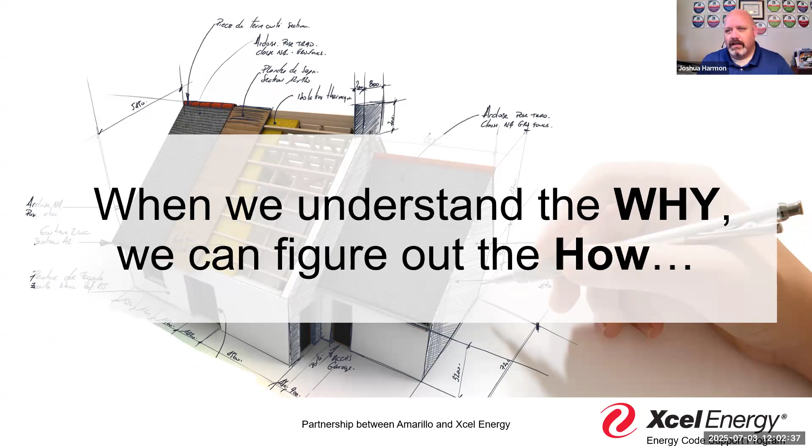So again, understanding that why is fundamental to figuring out how we're going to accomplish it. So when we think about the 21 residential construction code, it recognizes that the code is designed to provide us some minimum expectations, some minimum guidance on how we build buildings. And when we think about what's going on in the Panhandle region and the various communities that are there with building departments, we're looking for some consistency from the code's perspective on those minimum expectations.

And we know that there are people coming in and people coming out. Part of the problem is contractors move in, contractors move out, and they come with questions of, this is how we do it here, this is how we do it there. Well, the reality is by adopting model codes, hopefully we're eliminating some of those negative construction methods, right? And this becomes more of a standard uniform way of constructing buildings. Now that's how we take the residential code, right?

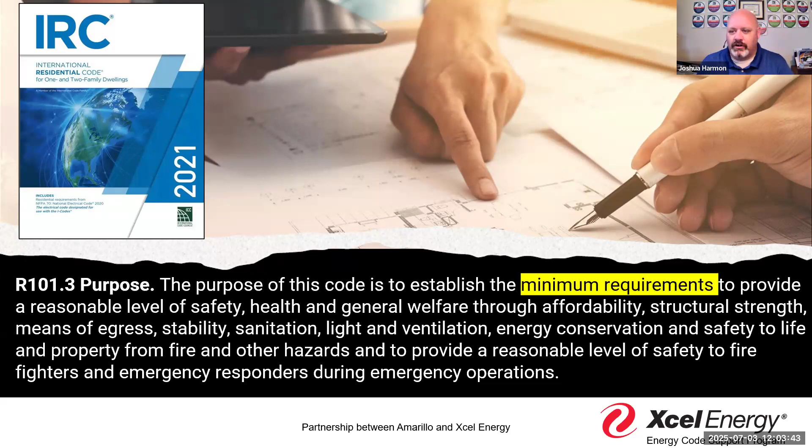Chapter 11 gets into the energy code to the extent that we adopt it, or if we choose to go with our own specific energy sections or adopt the IECC, we understand the IECC's intent was to provide a method of flexible compliance that would provide for the effective use and conservation of energy over the useful life of a building, right? It's all about flexibility. It's giving people options that we traditionally may not always think are there, but are really there, and to be innovative and to look at how technology is changing.

One of the things we're going to talk about during Coffee and Codes is we're actually going to look at some of the major differences between the 15, the 18, the 21, and maybe even the 24, to get how things have changed over time, and whether they changed enough to where you notice, right?

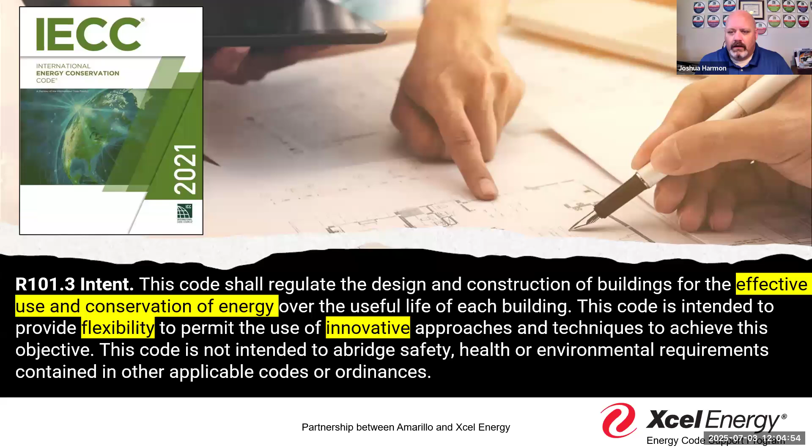And so I think that's part of that understanding: the code is designed to be flexible, whether that's the 15, the 18, or the 21. And I know we have all three codes within the Panhandle region. And so understanding that means we also have to back up a step and look at the scope of the code.

Now, I have jurisdictions that I work with that have chosen to maintain just the Chapter 11 and not adopt the IECC to make sure they keep separation between residential code, residential energy, versus what we see here, which is the scope of the residential provisions of the IECC extends beyond single and two-family dwellings and townhouses into group R2s, R3s, and R4s that are 3 stories and less above grade. So again, some jurisdictions have started to kind of whittle that down and say, hey, if you're a hotel, you're building it by the building code, so follow commercial provisions as well.

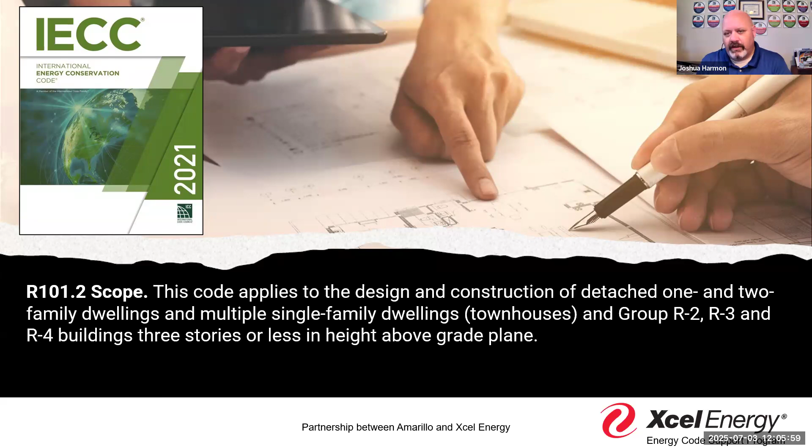And I think when you look at that, you'll see that there's not that much significant difference between the two. But again, it's an option. And it's why I think it's important to bring it up in the scope conversation. We start talking about wholesale, the overview of how we review plans for energy compliance. Because when you think about it in the context of the commercial side of the energy code book, you see that code applies to commercial buildings, and commercial buildings are defined as anything that's not already defined as residential. And so again, you get that kind of which section do I use, right? And so a lot of times I see jurisdictions doing that to kind of individualize their own approach.

But one of the things we saw in the 21 residential code was again starting to separate these concepts of the townhouse and the townhouse unit. Townhouse is still there as a building that contains 3 or more dwelling units, but the townhouse unit is more that singular dwelling unit itself, right? That extends from roof to foundation. Because what we're trying to do is make sure that we don't have common spaces, in some of those condo associations or townhouses, where we start to have uncontrolled air movement, heat loss, heat gain, but that those don't affect the individual dwelling unit.

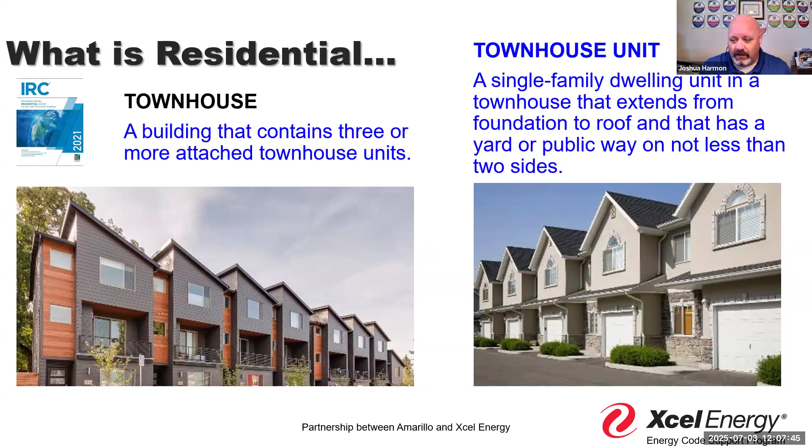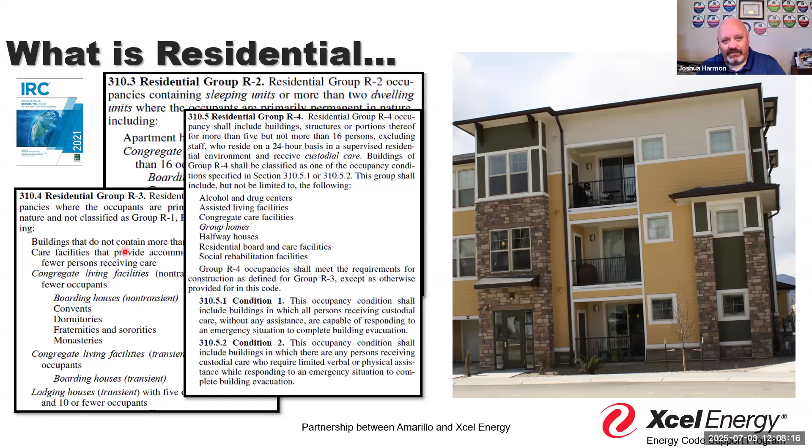Too many times what we'll see, especially in some of those townhouse units, is maybe a unit that becomes vacant, or more than one unit that becomes temporarily vacant, at which point that remaining unit is now paying to heat or cool potentially leaky neighboring units. So I think it's important that when we think about general plan review, we're looking at not just one singular concept, but we're expansive in what we think when we think energy code. Not just in the components of the building, but also the types of buildings. Remember, the energy code is saying we can expand the residential provisions into what would traditionally be considered R2s, R3s, R4s, right? And so when we start talking about those assisted living facilities, those congregate living facilities, things we weren't always thinking of in the context of the IRC, they may come into the IECC, right?

So when we think about plan review, I usually focus my energy code compliance into the 4 pillars. Now, if you remember, the last time I was out in April, we had worked on this little inspection guide to help address some of the concept of field inspections. I'm in the process, and maybe I'll have a draft by the time I get there in 2 weeks, of a plan review guide as well for energy code compliance. Not necessarily a step-by-step, but more of an overview of the higher level concepts, so maybe we can educate and inform our designers and our architects and some of our smaller builders who are thinking, what am I looking for, right? So that's part of what we're trying to do here: what are those main talking points, and how do we really get compliance.

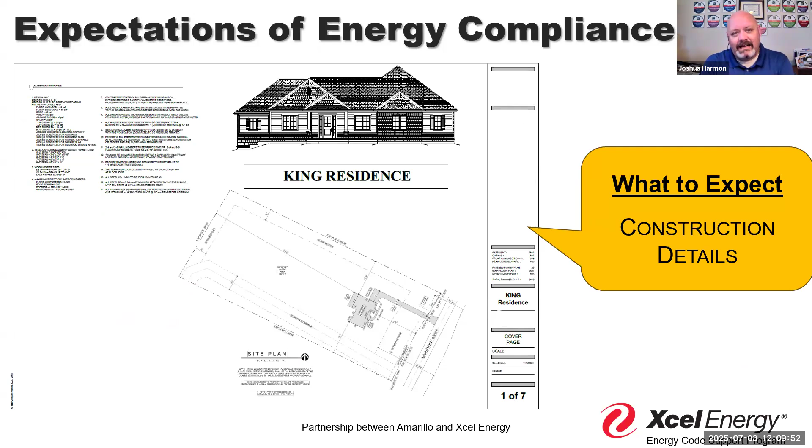So in that context, the 4 pillars that I see: building thermal envelope, mechanical systems, service water heating systems, power and lighting, right? Those are the 4 components. And within that building thermal envelope, we talk about the insulation, the fenestration, and the air barriers. But all of that is based on this expectation that we need construction documents, right? That there is certain information that's going to help guide construction, and that's going to be provided in the docs as part of our plan review process. Section R103 gives us a list of information that's supposed to be on those documents to help facilitate code compliant designs.

So when we're doing that traditional plan review process, we can throw in these expectations. Now, we talked about this a little bit when we were there for the in-person training a couple weeks ago. There are different ways to do this. There's the holistic approach to plan review where you do everything. You get one project, you do it all, right?

At which point do you take it page by page? You take it book by book, section by section. There's also the opportunity to have what we call segmented or specialized plan review, where you may have a set of plans examiners who do the structural components, and then you have a different set of people that do the mechanical review. Someone else does the electrical review. A person does the energy review.

So there's different ways to approach energy code compliance, and each jurisdiction is different in how we do that. But if we follow what the code tells us, really the only difference between the 15, the 18, and 21 is that in 21, we specifically call out energy compliance path as one of those things we need to know and identified on those construction documents.

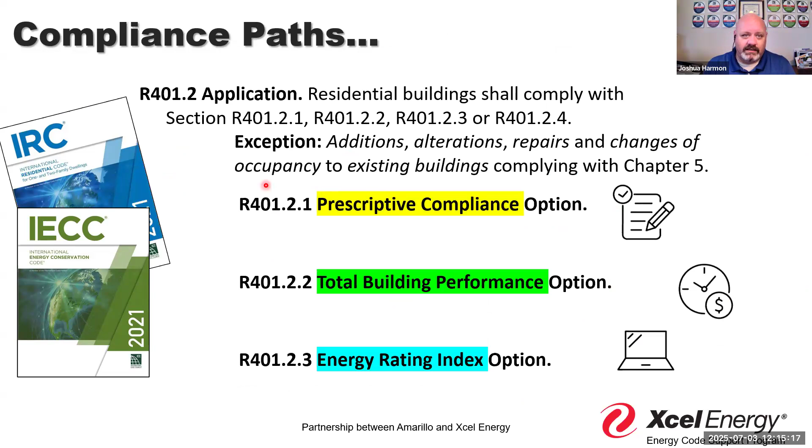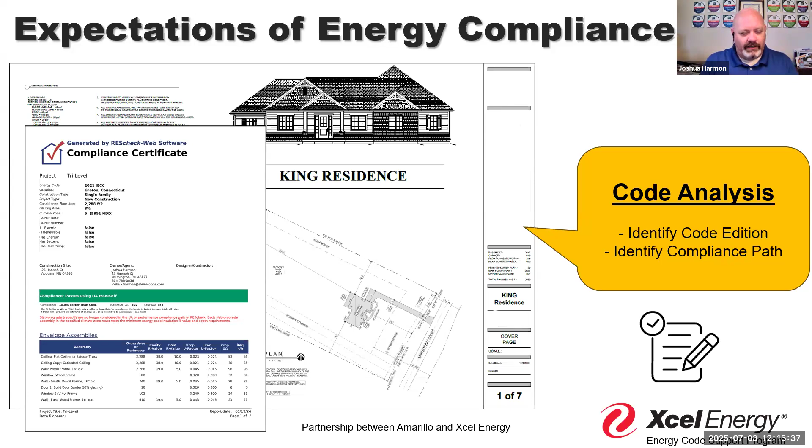The only problem with listing some of that prescriptive is, again, prescriptive compliance can be shown in more than one way. We can show prescriptive compliance by use of either a REScheck, looking at the total assembly, the total average U-factors, or we could look at it as an R-value. So there's different ways we can look at prescriptive.

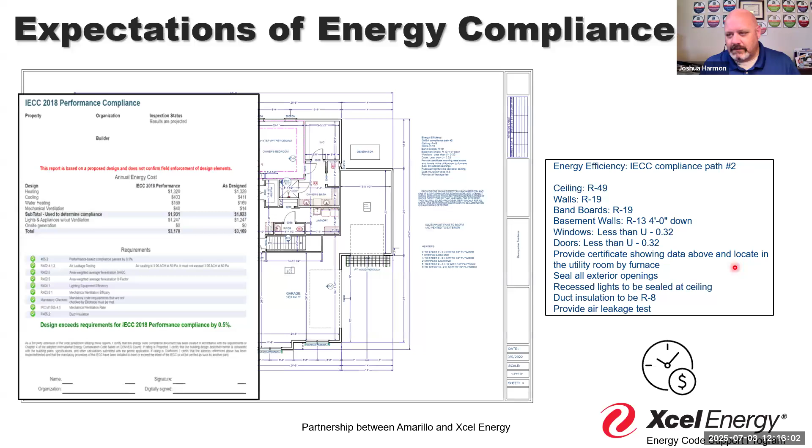If we're looking at a building following IECC compliance path number 2, what does that mean? We assume, based on the report, that they're talking about it in total building performance. But it's nice to have that extra performance in that list just to confirm. Then we've got the ERI, the Energy Rating Index. So again, we're going to get different documentation based on those compliance paths.

With those two performance compliance paths, I'll reinforce that you're going to get a report at the beginning prior to plan approval, and then a report at the end prior to final inspection. We do inspections throughout the process, but with those compliance paths, there's a third party coming out there verifying that those systems are installed properly. They're going to say, we're expecting an R21 in this wall. We came out, we verified the R21, and now we can run this report, and it performs at the end the way we thought it would from the beginning.

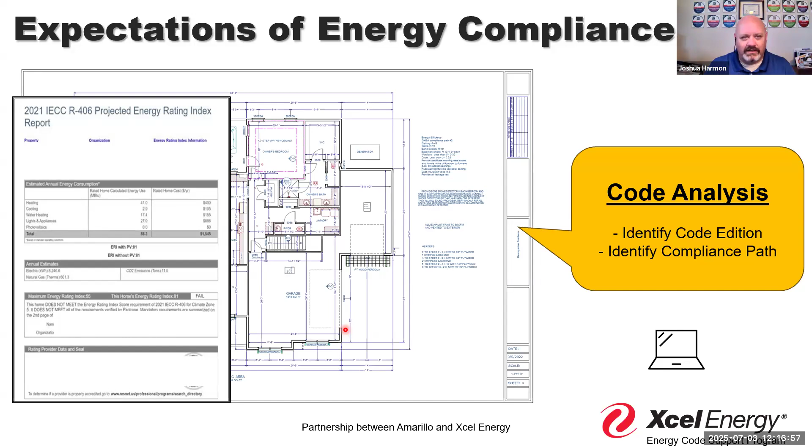Depending on your compliance path, that can have some impacts, but we'll talk about compliance paths in a much deeper conversation later. Today, we're just thinking high level.

Beyond that compliance path, we get into the concept of the insulation, the envelope, that thermal envelope that separates our environment from the interior occupied spaces, that allows us to control conditioned space from non-conditioned space. So what are we talking about? What are we looking for in that? Well, I say we tend to look for these four concepts.

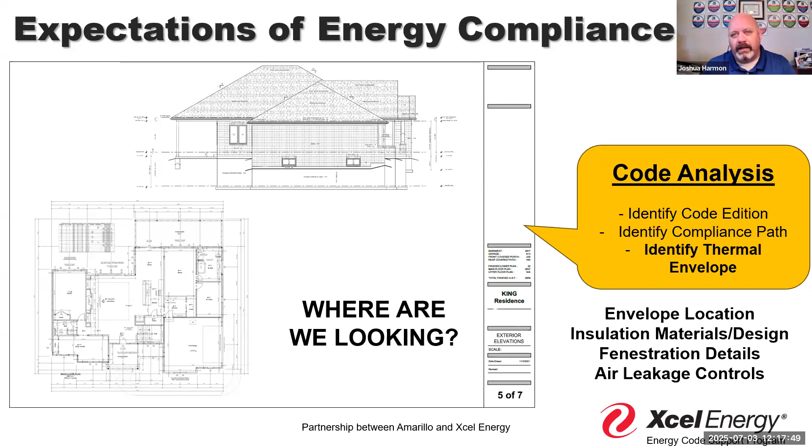They're identified throughout the code in different subsections. We're looking for that envelope location, because if we know where we're looking, that's part of it. If I walk into a building - and I had this conversation with a designer the other day - I said, where's the depiction of the thermal envelope that's required by section 103.2.1? Their response was, anywhere there's insulation is part of the thermal envelope.

Are you sure? Because if that's true, then I'll use my pen here. When you installed insulation in this wall, and in this wall, and in this wall, and in this wall, here, here, here, and here, are those all separate conditioned spaces? Well, no, that's sound attenuation. Well, then let's be clear what we're saying.

I tend to - you guys have known me, heard me long enough - I can get kind of grumpy, and a flippant response from a project designer usually gets a flippant response from me. I'm glad I don't work for any jurisdictions anymore, because saying something as simple as all insulation is going to be part of the thermal envelope - you put insulation between those up in that ceiling area, but is this ceiling going to be vented or unvented? It's not a simple conversation of all insulation. It's too easy of an answer.

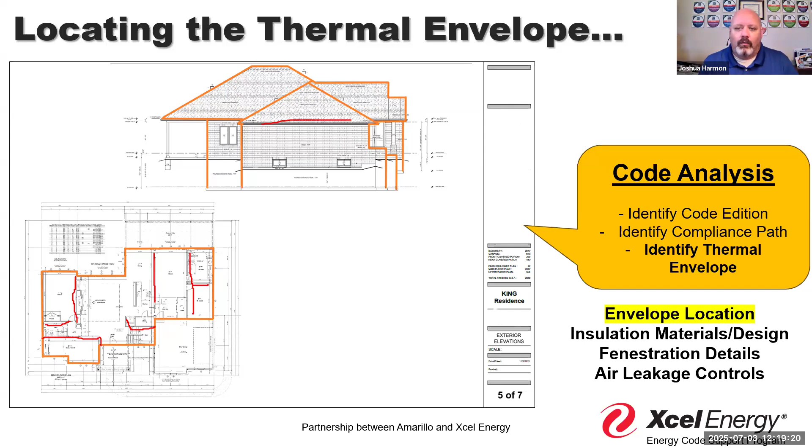We need to know where these are, because if I know where they're at, then I can better perform my inspections as a building inspector. Once I know where they're at, then that can affect what they are. It gets more into that concept of what insulation is being provided.

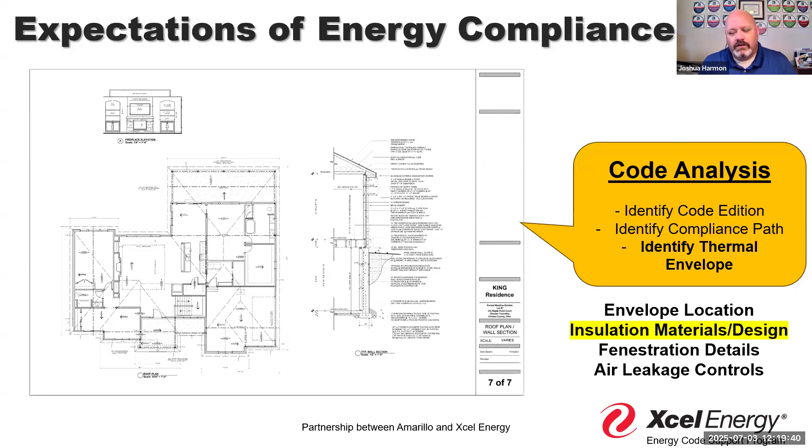Because if I'm looking to control - we see here some batt insulation versus some different types of maybe spray foams or different materials being applied. Again, each material, we know that insulating materials do different things. Not all of them simply resist heat transfer. Some can also resist airflow.

So if I'm installing a rigid insulation, or a set or certain thickness of spray foam insulation, like we like to do, that's going to have a different impact on my building assembly than if I just install mineral wool, or if I just install some type of batt insulation, fiberglass batt.

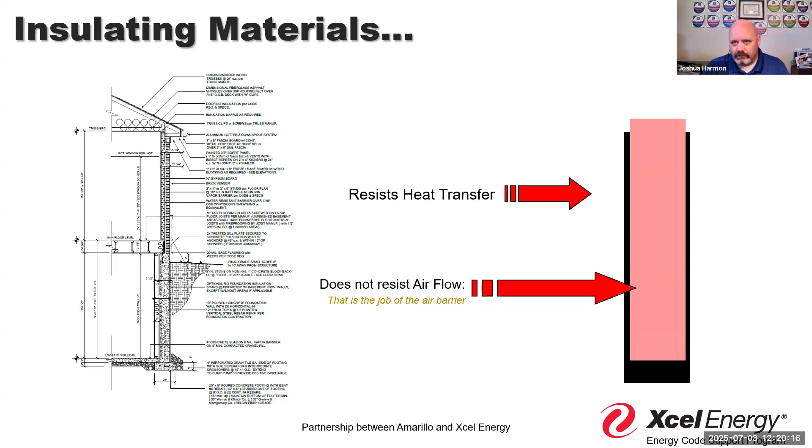Beyond the material differences, there are also insulating differences, so I can't just say one is just like the other and call it a day. We're going to have deeper conversations about what it means to review for insulation. We're looking at two different types of values: an R value, which represents the thermal resistance rating of that singular material, versus a U factor, which looks at how much heat transfers through the entire assembly.

We know that most walls aren't just a single component. There's drywall, there's cladding, there's sheathing, there's barriers, and all of these different components in that assembly. So we want to make sure we can take advantage of all of those different thicknesses of material and their different thermal resistance ratings.

One thing I point out is in my particular home, which is a little different than the one across the street where Annie lives, my house is closer to the state route. So they installed thicker drywall intentionally on my walls, and they insulated my exterior sheathing, or cladding. The vinyl siding got foam insulation behind it, which is different from my neighbor. So again, we both have the same R13 in the wall, but we don't have the same U factor because of those differences.

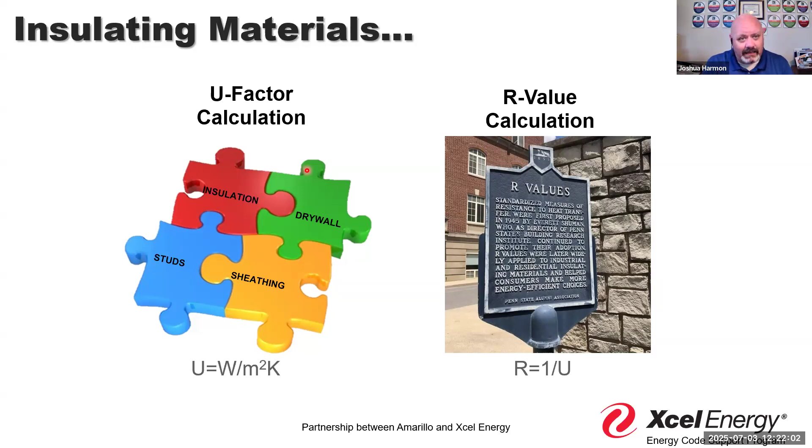Mine was for sound attenuation. I guarantee that when Bill was building this house, he was not thinking, 'I bet I could insulate a little better with an extra quarter inch of drywall.' But in essence, he did, because we understand those are different systems.

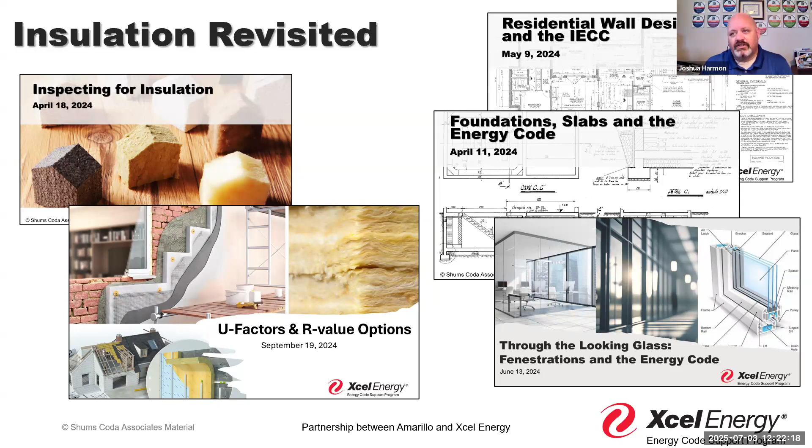If we have designers that have questions along the way, we've got a variety of different trainings we've done over the past two years that can help in understanding those processes. We can always send that information out to those that might need it.

We understand that there are a variety of different materials that provide thermal resistance, and those different materials can provide additional qualities. If I'm using mineral wool, I might have more water resistance than if I use cellulose. A blow might be easier to install post-construction versus a spray foam, or a batt. I might get some thermal or water resistant nature through different types of rigids and sprays that I don't get through batts and blows. So there are different types of things to consider.

One thing I think is important to reinforce, and we'll talk more about this when we get into insulation-specific plan review concepts, is that if we start modifying or changing these systems, we can impact more than just the thermal value. It's not just making sure we have an R10, R13, or R19 in the wall. It's also thinking about how that affects water resistant barriers.

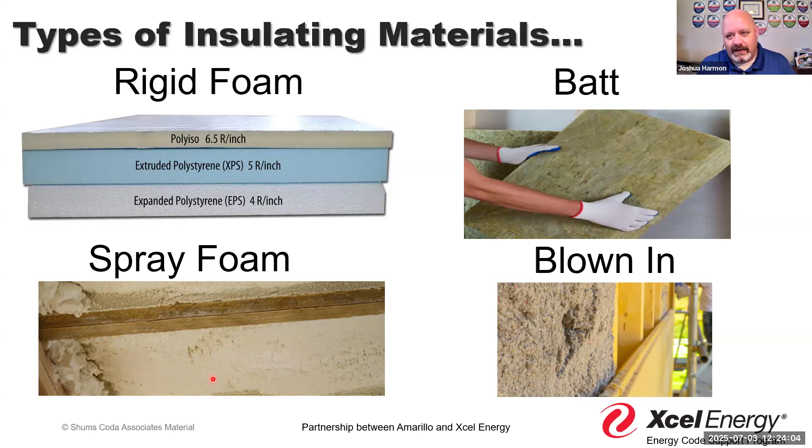We want to make sure we don't create a situation where we originally spec'd out spray foam and then decided, 'I don't want to wait for the guy to get here, we're just going to batt it up.' Did you think about the location of your water resistant barriers, your air barriers? That spray foam was going to do two jobs, and now you have to find a replacement to make sure we don't have water accumulation, moisture, and humidity getting in, like that dust that blows in from the east and fills up some of those spaces. Spray foam won't be affected by the dust as much as batt insulation might be.

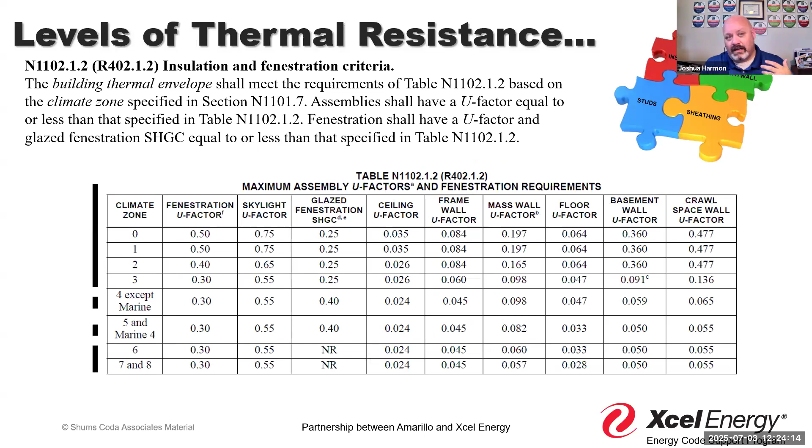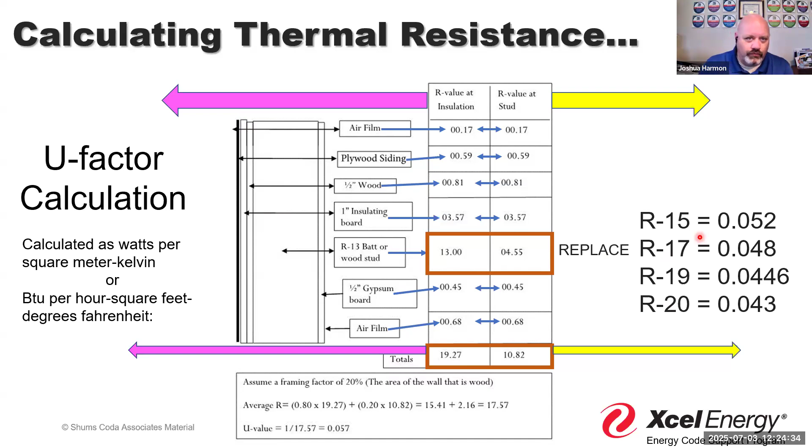We know there are methods of calculating, and we've talked about that. The tables exist for us to compare to that prescriptive compliance option, and we see different values provided. I don't think I have one in here that shows the multiple years at once, I should have, but we can see how we can start to move, modify, and change some things, and really affect how that building's total U factor is impacted, the assembly, just by moving one piece of material.

One thing we're going to be talking about in one of our future sessions is the role of the ASHRAE Appendix A. In the 2024 IECC, there's an appendix that might be useful to print off as an example.

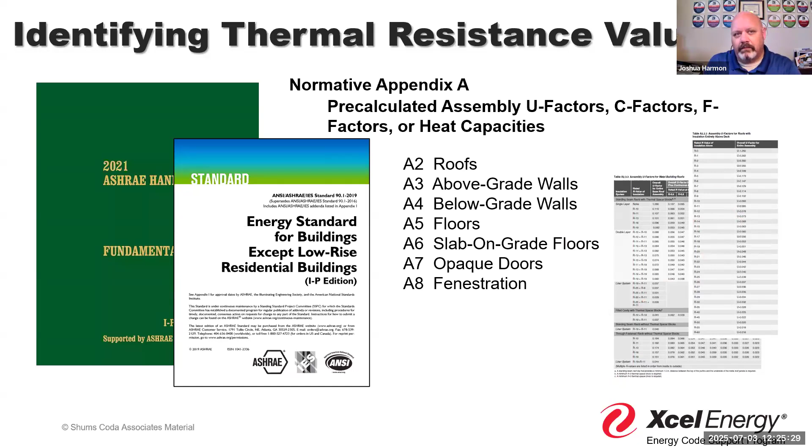What Appendix A—I think it's 24 IECC Appendix RA or RJ, one of those—does is provide a series of alternative designs. They take things like roofs, walls, and floors and give a U factor based on this R value and this thickness of wall, or this type of insulation, this type of concrete versus block wall design.

So again, it gives us some options to help make life a little easier calculating those values. But after we got those values designed, we once in a while want to make sure we think about the type of information we're getting. We don't want something that just says, 'I'm doing a 2x4 or 2x6 stud at 16 on center, so just insulate and put a vapor barrier per the code, whatever that means.' That's not helpful, because depending on our climate and our code, we might have completely different values we're looking for.

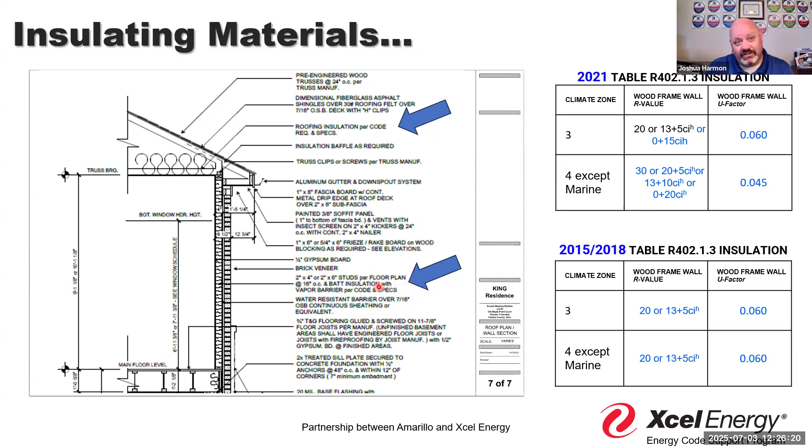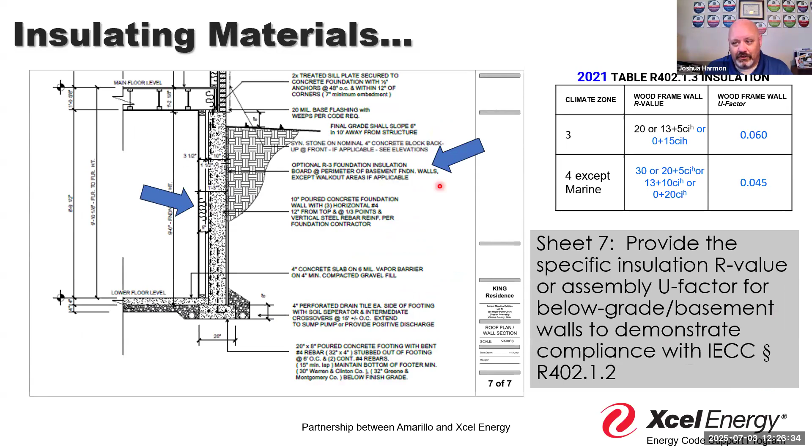What we're trying to do is make sure that, yes, I know the thickness of where you're providing this insulation, but I need you to tell me what that R value is as a designer, so I'm not making code decisions—you're making decisions for the design. So once in a while that means providing a comment that says, 'We need you to specify those R values or assembly U factors to demonstrate compliance,' because we're not going to make up things throughout that process.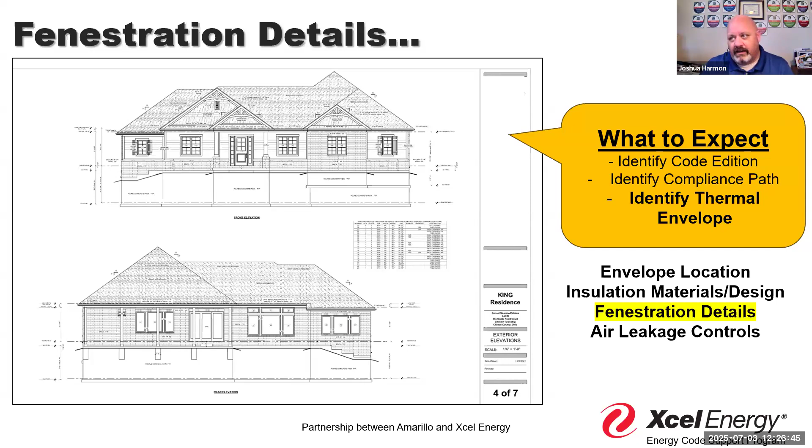Like I said, I need to go a little faster, we're going to run out of time. So some of the things we think about in this overview of the plan are, again, what types of windows are we installing, what are the U factors or solar heat gains, and how's that information provided on our details? Because if it's not there, then we have to make up decisions or wait for responses.

One thing I like to point out—I know all jurisdictions are different, we talked about this a little last time I was in town—some jurisdictions charge for that plan review time. So if I have to spend an hour looking for window details because you gave me a spec book, especially on large commercial or larger residential multifamily projects, if I've got all these windows and no thermal values and no simple minimum or maximum value, then I'm going to be reading things, and that's going to cost time. Either that cost is one the city won't recuperate, or it increases the cost of the permit because I'm spending that much more time looking.

I've had contractors, especially on large projects, say it's in the specs. Well, you understand you gave me 3 volumes of specs worth about 3,000 pages—if I'm supposed to read 3,000 pages to figure out the U factor on your window, you're getting a bill for that. At least in my jurisdiction, you're getting a bill for that. It's not just a question of billing, it's also a question of time and efficiency. As an employee or supervisor, I don't want my staff spending 3 hours reading spec books when we've got 15 different projects that need to get done.

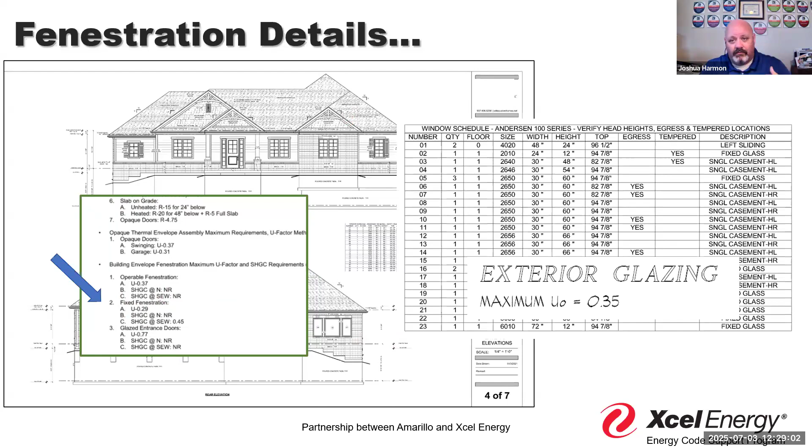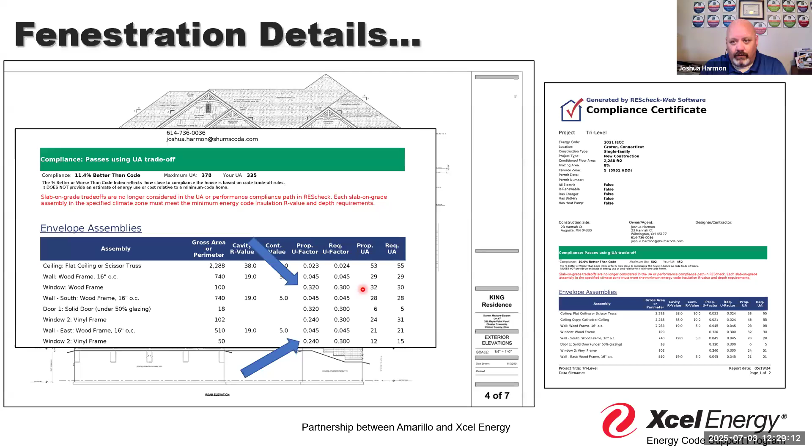Once in a while we may get a COMcheck or REScheck as part of our design, and we're going to verify that what we proposed in those windows is what we actually get. We see a proposal for a solid door at 0.32, but a solid door elsewhere at 0.37. So which one is it? We have fixed and operable windows at 0.37, but this says 0.32. So are we going 0.37 or 0.32? I need to know. Then I get back to the table and it says 0.30. So we can get variation.

This is one of those things I tend to really get into commenting on, the inconsistency that exists. What's going to happen is my inspector shows up on site and says, 'You need this window because your REScheck says you're supposed to have that window,' and they say, 'Well, no, our approved plans show this.' That conflict will naturally exist in the field that shouldn't have to exist if we take time to verify that all the numbers are the same.

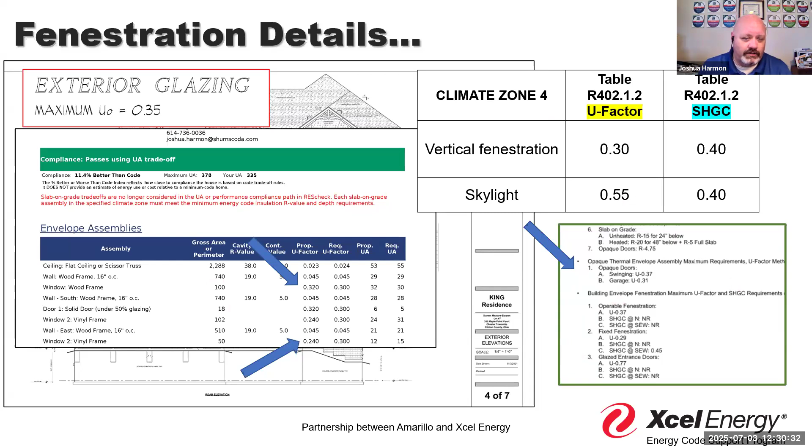When we get into mechanical load calculations, which we'll talk about in a couple weeks, that inconsistency can impact them. If I've got a contractor, inspector, or plans examiner looking at mechanical loads for residential structures, and we've got windows that don't work the way they're supposed to, that can affect how that equipment is going to work in the long run. So again, provide those details.

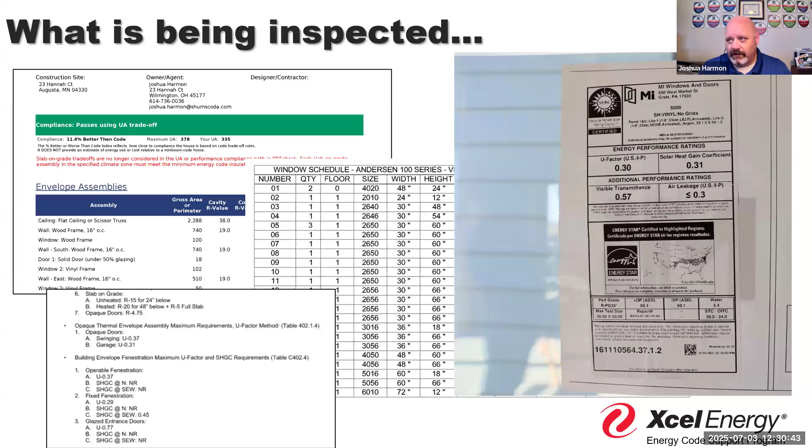If I have to keep looking for them, it's going to be a problem. My inspector needs to know what he's looking for when he goes out in the field to verify compliance, and where we get those values from the manufacturers. If we don't have that manufacturer's information, then we have to apply the code's default values, which are not going to be helpful. We've talked about that before, and we'll talk about it again in a couple months.

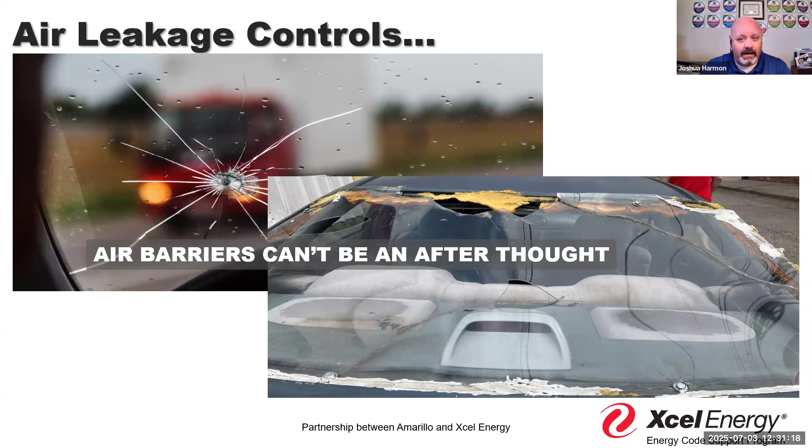Also, we look for those air leakage concepts and controls. How are we testing? Are we visually inspecting? Tell me up front what we're doing. There's nothing worse than not having that information and trying to find it out later. If you're not going to do testing, just say up front that we're going to provide visual inspection of the air barrier, or that we're going to use a thermal camera to perform an evaluation. Give me something.

I understand, and we talk about this a lot, there's not a lot of raters or people with that kind of capacity in the Panhandle region, but we can give some detail on what we're looking for. If it's not going to be testing, what do we approve as an alternative? Is it a visual inspection, or that we've sealed all openings and penetrations? Give me some descriptive method to verify that we've considered air leakage as a whole.

What we're hoping to do, and this will be a fun conversation, is get with the Builders Association and a local builder, sometime soon, and try to do a smoke test of an actual building during one of the Panhandle happy hour with a builder concepts. We can invite building inspectors and contractors, and we're going to have a barbecue. We're going to smoke barbecue and smoke a house at the same time to see how much air leakage we're getting out of standard construction.

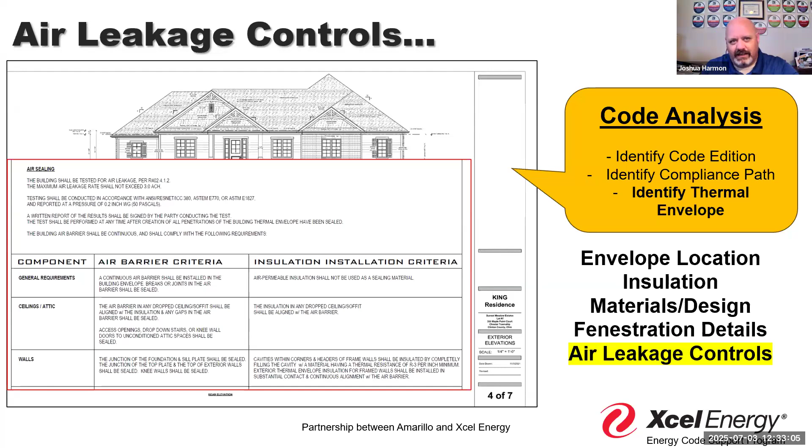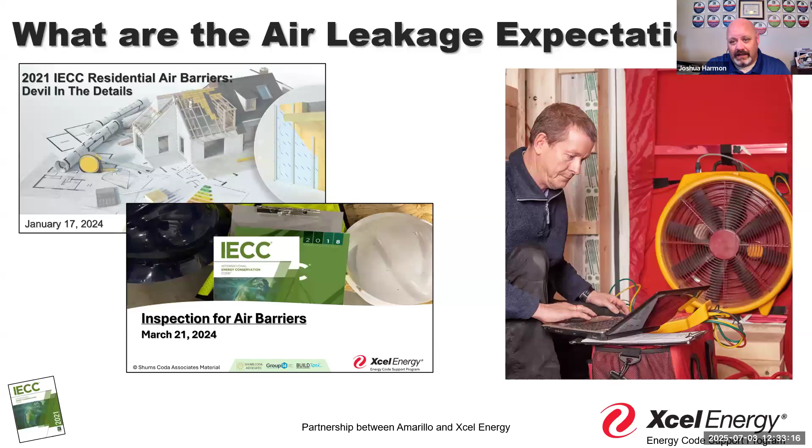How can we easily identify it? Just smoke it up with a smoke machine and start putting tape on the wall so we know, hey, we're losing air over here. Let's get some caulk and seal it so we can control how much of that conditioned space is leaving our buildings. That's something we're thinking about to facilitate this concept in the field, because that's a big issue a lot of people have questions about, especially when we don't have a rater or blower door operator always available.

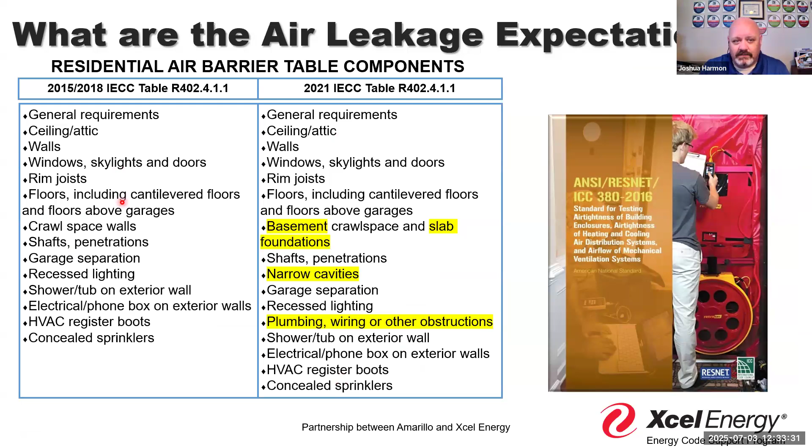So the code gives us a variety of different expectations associated with that, and the types of systems that should be looked at. We'll get more into that as we get into air barrier conversations and testing requirements. The code also obviously expects us to not just look at the insulation, energy code is way more than just insulation.

Once we've got past the concept of proper insulation and air barrier installation, we get into the thing that really affects how a building performs: the mechanical systems. Because that's what actually uses energy, right? We don't wire the drywall, we don't wire the windows, we don't wire the air barrier. We wire and spend energy, whether that's electric or gas, on mechanical systems and lighting systems.

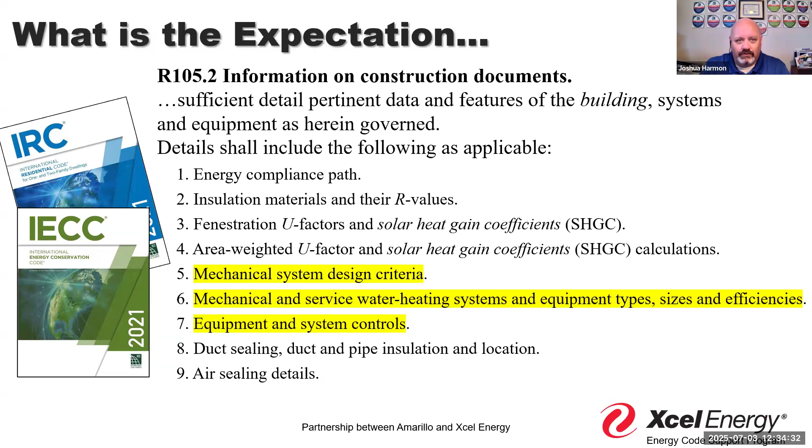Lighting is still a simple concept in the 15, 18, and 21 codes. But what we really get into is, what is the mechanical design? Those expectations are supposed to be provided as part of this compliance.

So a lot of times I get projects. I just turned one in yesterday. It was a brand new residential home. Thanks for sending me the information, I did a review of the structure, but what you did not send me is a mechanical sheet. I don't know how you're getting mechanical ventilation to any of the rooms. Ventilation, space conditioning, what's the equipment? I see you have a mechanical room, but where's the duct work going? Are we using ducts? Are we using ductless? What are we doing?

And then I got plumbing. I see where you have a fixture identified, a toilet or water closet, a sink, but you didn't give me any information about where you're locating, what's the size of your water heating system, how we're piping it, how long those pipes are going to be. None of that information is provided.

Same thing when it came to lighting. Oh, I appreciate you putting a page E in there to tell me how the panel was going to be organized, but that's the end of it. There are certain things that I'm going to need.

And so again, that's why it's important. We'll have deeper dives into mechanical systems and power and lighting systems as the months go on throughout this series, this plan review series. But understanding why we're looking at information, why we're looking for that information, is really important to figuring out how we're going to get it in.

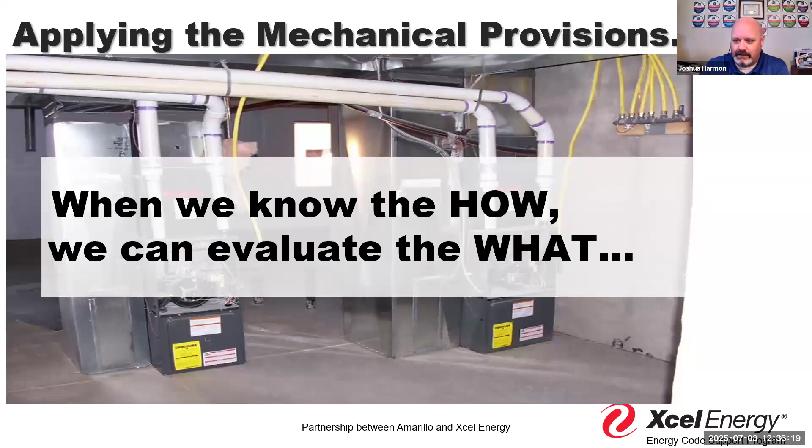How we're going to provide that space conditioning, right? We understand that that's what's using the energy. That's why we need to know how it's being designed. And then with knowing what it is or how it's going to be done, we can evaluate what they're utilizing in that process. So to me, mechanical is a simple thing: the simplification of it is, is there a proper design?

And again, that's a conversation that really does create some conflict, right? What is the manual J supposed to have in it? Did you do one? Did you do this right? How do I evaluate it? I've had conversations with contractors and plans examiners alike across several jurisdictions and across the country: is this my job? Is this not my job? Where's the line on what the expectation is?

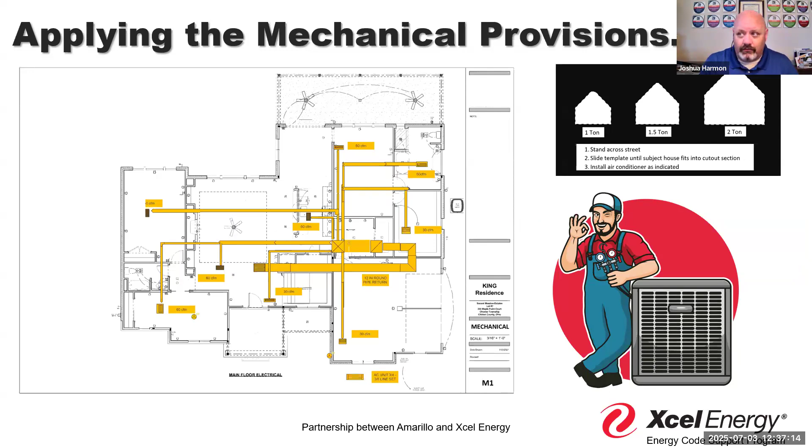And so I think that's part of what we need to understand. That's why we're going to take some time to get into that manual J, into that mechanical design. But again, proper design is important because we can't just take the word of an installer. We need some kind of analysis that says, based on the elevation, the heating, cooling, the amount of glazing, the level of insulation, all these different factors, how much heating and cooling is going to be needed for this building.

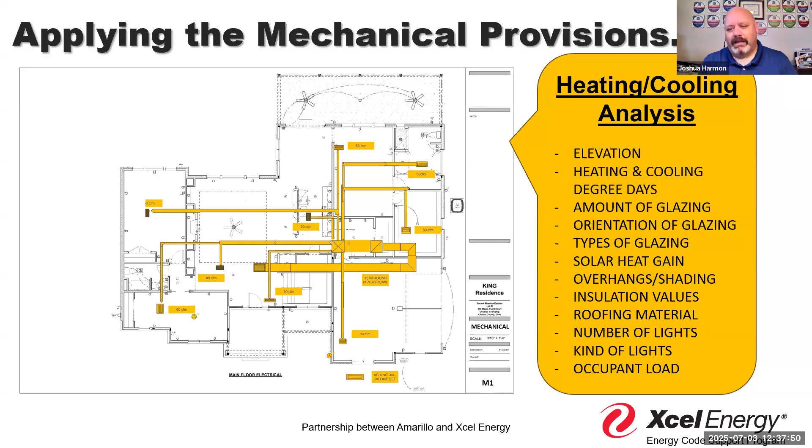Now remember, the code says we have to provide heating to a 68-degree temperature, but the mechanical provisions, the mechanical code, and the energy code all say, if you're going to provide cooling, that system has to be designed to a standard. We can't just say here's the air conditioner, it'll get you close, but it will never provide what you want. Because what would be the point of having a system that's never going to get me where I need to be? And so I'm always going to have open windows anyhow and have uncontrolled ventilation, right?

If I'm providing mechanical ventilation, mechanical air heating and cooling, then I need to make sure that I'm applying some type of design. And that's where the manual J, manual S, manual D come in, to make sure that we're providing not only the appropriate calculation for heating and cooling loads, but then how are we sizing that equipment to meet that need, and how are we distributing it so that we get the right amount of air in the right spots to perform the way we want it to. We've all seen designs and installations that are ineffective at best.

We've had oversized fans that shoot out so much air it blows the papers off the desk every time it activates. And we've had systems that provide so little air that they're useless, right? We're not getting any temperature change or impact in that area.

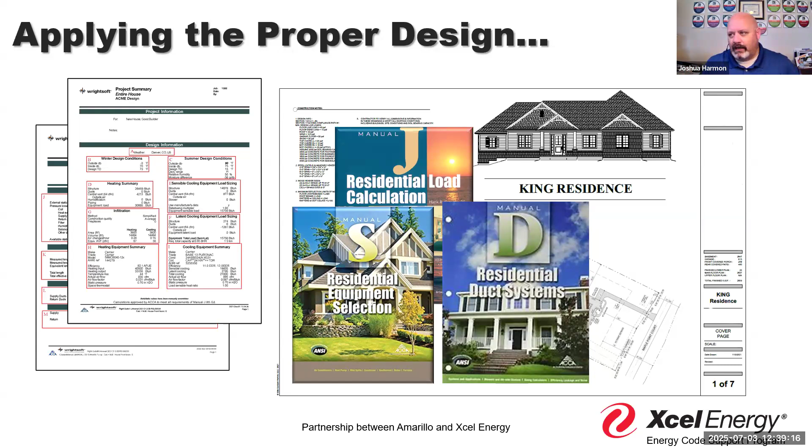So again, we want to make sure that we're thinking about those systems, whether that's something that's done in the field or done as part of an upfront plan review. I get they're sometimes submitted as part of a phased submittal process, but we want to make sure we're evaluating them, and we'll talk more in detail about that later in a different webinar.

Again, what we're looking for is not only the proper design, but also the proper equipment efficiency. Now, for the most part, this is going to be something that's handled mostly through federal law regarding the manufacturers.

One of the things that I'm starting to see more and more is the change in the A2L refrigerant requirements, and this is one that I personally know of because I went to go buy a new air conditioning system. I have a two-stage system, and when I went to talk to them about buying the components, I got: we've got an outside unit that works with 410A. We don't have any...

But we're going to run out of 410A real quick, so we don't know if we can actually charge the system once we get it to you unless we do it right now. What? And once we run out of 410A, or we know 410A is getting more expensive, if you do have to recharge it, it's going to cost you an arm and a leg. Okay, so let's go with a 454 A2L refrigerant in this system.

Okay, well, yeah, we can do that for you, Mr. Harmon, we can get you the outside unit, but the inside unit is going to be about 9 months. They're behind in manufacturing. So I'm going to wait 9 more months to get my air conditioner fixed. That's really helpful, right? And so what we see a lot more, not only personally, but I see that in plans.

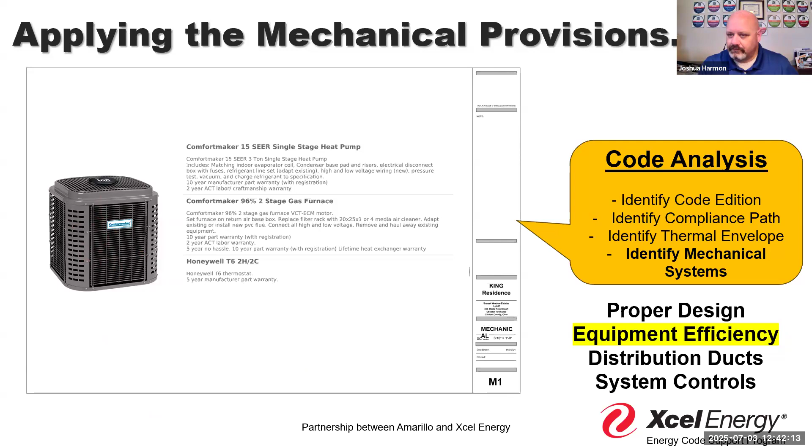How does this affect the efficiency or the size of equipment that you're going to get? Because these are not just simple coil changes. You can't just change out a coil and add a different refrigerant. Those refrigerants go to different pressures, which can affect the coil and what it will and will not allow. Different oils, all that stuff. So again, we start to evaluate how those mechanical systems work. And when we start talking about swapping out systems, don't even get me started, right?

We'll talk about that a little bit more as we get into it, but we talked about this in the plumbing class last week. If we start taking out certain things and swapping equipment, it really becomes a question of what are you doing? Are we replacing an existing 40-gallon gas storage water heater that maybe has a rating of 40,000 or 45,000 BTUs with a 199,000 BTU tankless system?

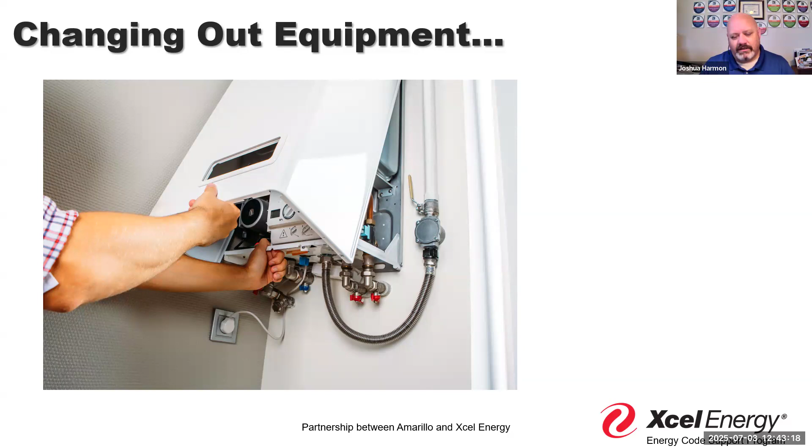Well, we're impacting how much gas goes into that. So it's more than just changing out the equipment. It's also about looking at the full impacts that it might have. Everyone's going to say this is a more efficient design, unless it costs me a lot of money to replumb my entire gas system, right? So there's going to be some considerations, regulators come into it, and there's a lot that we could talk about when it comes to mechanical designs. We'll talk about applying mechanical requirements in greater specificity in, I think, August.

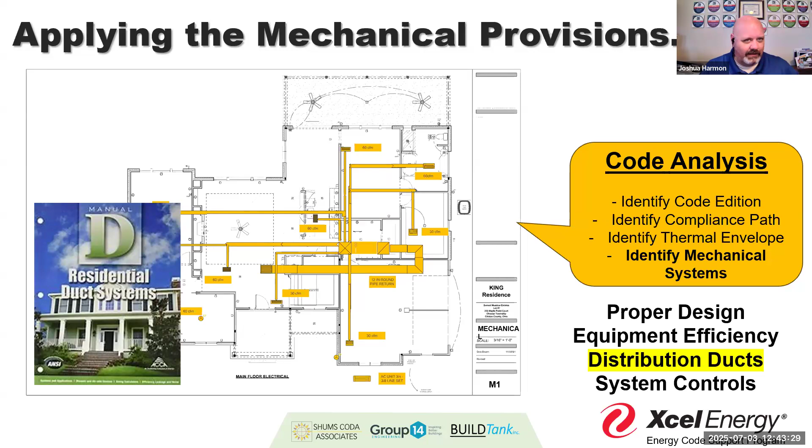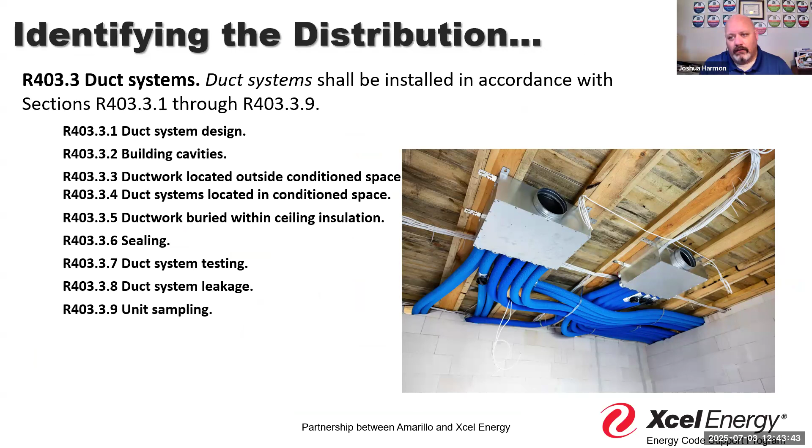Again, distribution ducts. The code gets into whether, again, we're in 15, 18, or 21, what are the expectations for those distribution systems? When are we required to provide insulation? When are we not? What are those expectations? And so again, we'll get more into duct systems as we get along, but having that duct detail is really going to be important, because that's going to drive our idea of where we need those controls.

The code currently says you have to have one control per zone. There has been conversation, although none has taken hold yet, so I'm keeping an eye on it. But one of the things that has come up several times is, how do we calculate and where do we control? Do we control at a central location? Do we control anywhere in the building? Or do we control at the longest, furthest run, right? Those are considerations that are being brought up at code development. And again, it can have an impact on how that building is sized, that system is sized, and how that building's going to operate.

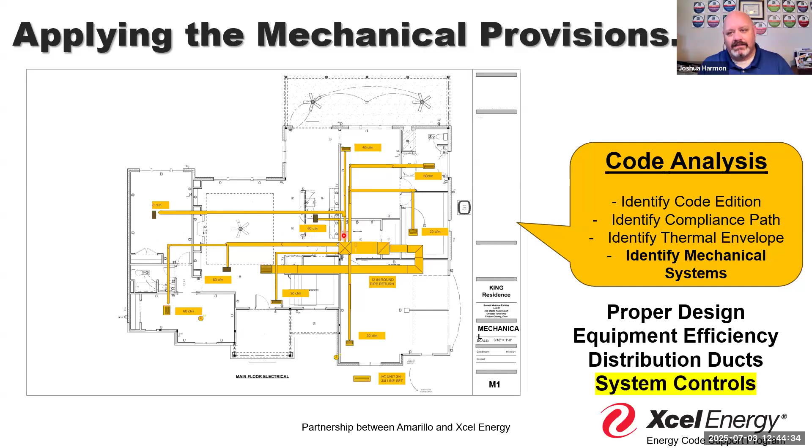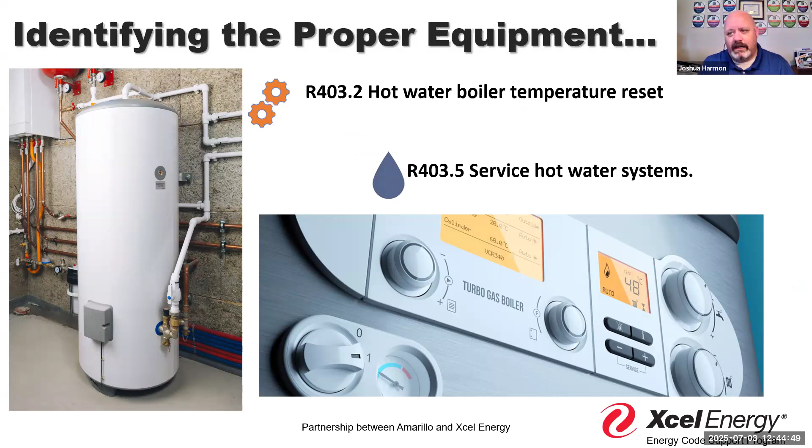Beyond mechanical, like we said, there's going to be service water heating systems, hot water boiler systems where we may be using one tank to do both hydronic heating and service water heating. How do we make sure we size it properly? These are all considerations that we'll talk about when we get into some of those service water conversations.

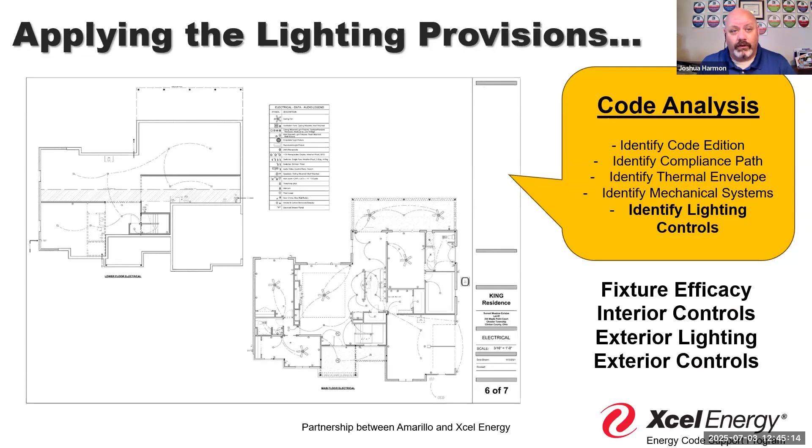Now, lighting controls is pretty simple still for most of the energy code compliance side of it. It's all about lighting efficiency for the 18 and the 15 codes. When you get to 21, we start to get into what is expected when we talk about exterior lighting controls and more importantly, interior lighting controls. For the most part, what the code will begin to look at in the 21 version is, well, let's back it up. The 15 version of the energy code for lighting says that you have 75% high efficacy light bulbs installed.

Well, that kind of changed by the market, right? The market just made it, hey, why would you separate high efficacy from normal incandescents? Let's just go all in. And the market's changed that direction. At 18, it went to 90%. By 21, it's 100% of all lighting fixtures inside the residential unit have to be high efficacy lamps. More importantly, it starts to say in certain habitable spaces inside the residence, you have to provide a dimmer or occupancy sensor, a control that allows people to dim the amount of light they're using. So it's not an all or nothing kind of environment. So that's a huge conversation.

I literally just read before getting on class where some design firm was actually sending out emails to jurisdictions, and this one was a state jurisdiction, state building officials, saying, hey, our clients are saying that they're not enforcing this requirement. Can you tell us what you're doing to encourage? It was an ISO rating, right? And so, again, as you think about it, there may be requirements to have dimmers by the time it gets to the 21 version. 24 goes a little bit further than that. It gets into what size bulbs you can have, or what wattage lumens per foot you can have in a building. So again, things to think about when it comes to how we address those.

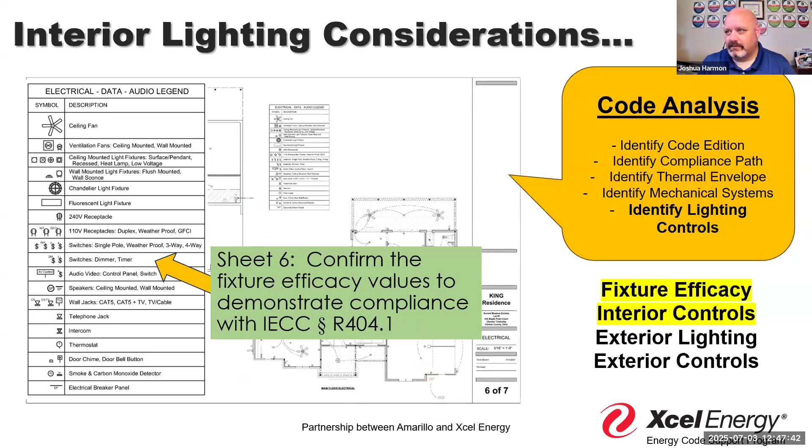Sometimes you'll get that in different formats, whether it's going to be a more detailed lighting fixture schedule or electrical notes. Again, that's completely up to the jurisdiction and the designer as to what we're getting. This one here, like we said, tells us some things are based on compliance path. This may be a requirement under their compliance path because they're calculating how much energy is spent lighting the building versus, you know, how many times have you left the house and left all the lights on, right?

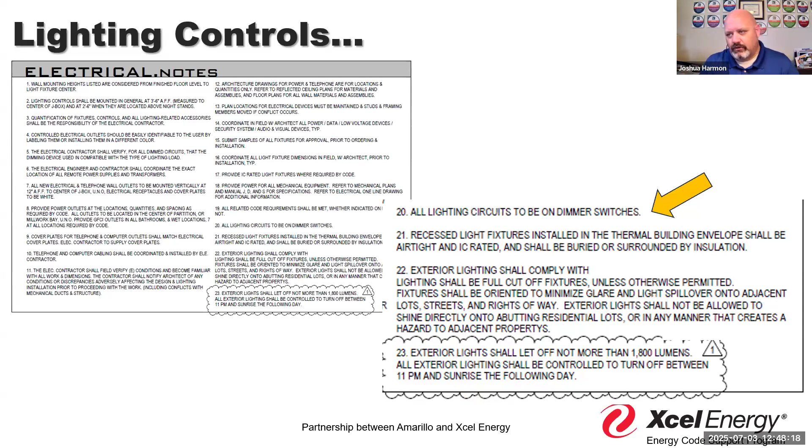So again, when we start talking about those exterior lights, it could be something that we'll find in fixture schedules, like we said earlier. We may see that in multifamily housing, especially when we start talking about those lighting systems that kind of migrate across different units, right?

So we're going to put in some astronomic switches that say, hey, when it's dark out, we turn the lights on. When it's light out, we turn the lights off, as well as maybe a time clock that says, hey, we'll leave the lights on till 10 o'clock, and then we turn them off, and they become photocell or motion activated, right? There's going to be some potential things that we see come out of multifamily exterior lighting considerations that don't come from our traditional single-family, two-family dwellings.

And again, I think that for the most part, most of us understand how that would be different. It's one thing to pull into your own driveway and have no lights. It's completely different when you're pulling into a multifamily facility or a multi-user facility and there's no exterior lights, right? Because there's, and we'll just leave it at that, right?

There may be some different concerns that people have when you pull in the driveway, and I can probably tell if there's somebody at my house versus I pull into a condo association or an assisted living facility and I don't know, is there someone around the corner? Maybe not necessarily in a nefarious way, but if I turn the corner and there's Bill, my neighbor, I'm scared to death and I drop my eggs.

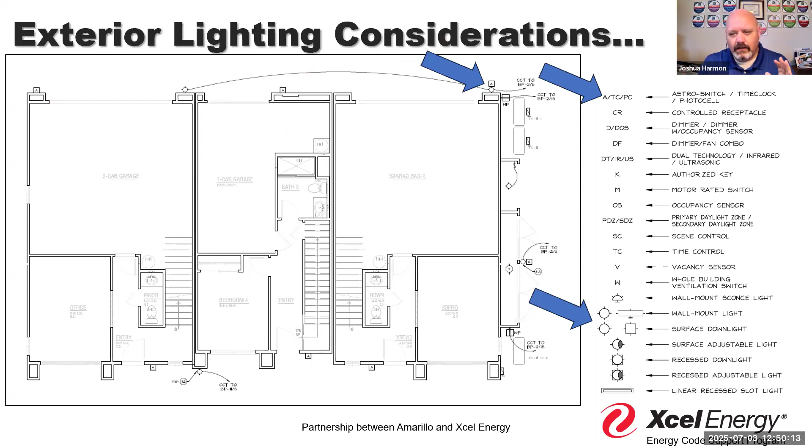That's going to be just one of those inconveniences. Again, the code is saying, not only do you need to provide that light, but you also have a way to manage the energy associated with that lighting system.